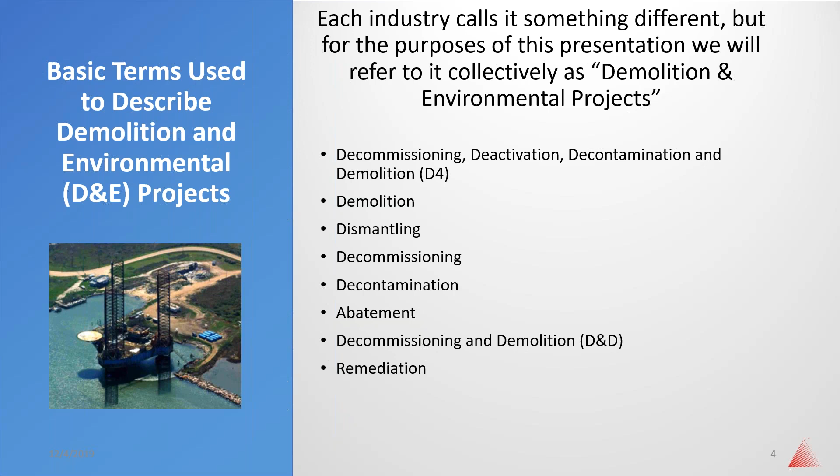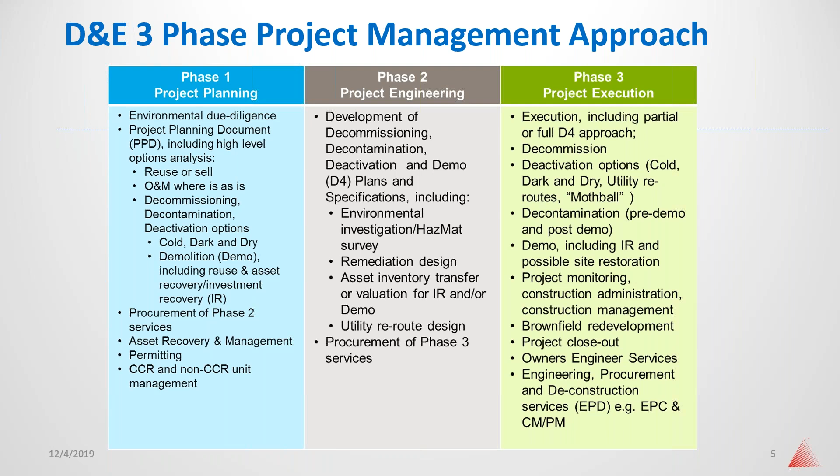Then you have phase three, which is project execution, the nuts and bolts, actually making the project happen. So it might include remediation, decommissioning or hazardous material abatement. It might include demolition, site restoration, investment recovery, or all the above.

So the next two slides show some of the elements of a D&E project. Some or all of these tasks might or might not apply to you, depending on whether you're an owner, an engineer, or a contractor.

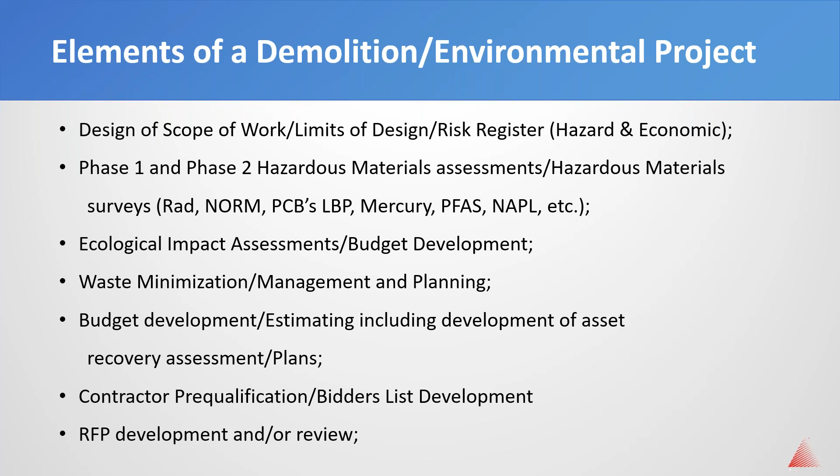So here's some more of the elements, and again, they're all in line with the PMI Institute approach. Now, one of the first things you must do before you tear something down is to decommission it. That collectively includes making the facility ready for further action by performing such things as lockouts and tagouts, reroutes, purging and cleaning of piping, equipment, and so forth.

In a previous slide, I referred to the principles of investment recovery. That philosophy is affectionately known as the 7 R's, starting from the reuse option, decreasing in value all the way down to remove. If you think outside the box, using the 7 R's as your guide, you can pretty much feel confident that you've exhausted all options to achieve maximum value.

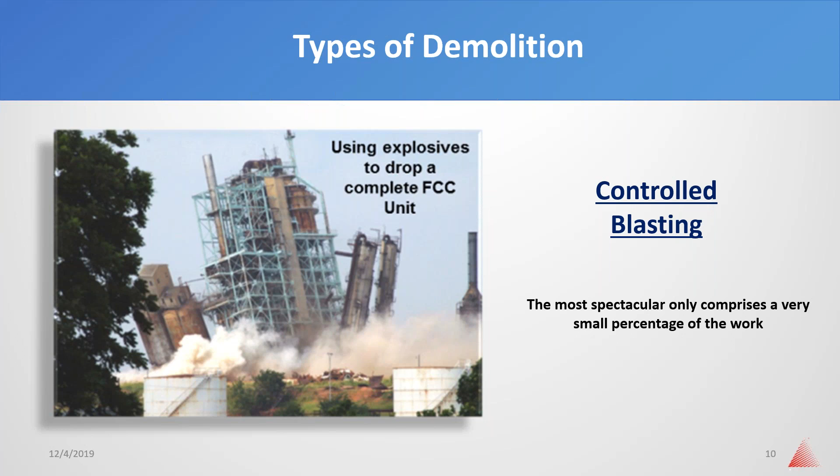So let's look at the different types of demolition. Controlled blasting is probably the most spectacular, but only comprises a very small percentage of the work. This shows dropping a 300-foot-tall, 3,000-ton fluid catalytic cracking unit at an oil refinery in Oklahoma. Now, most of you have probably watched something like this on television or experienced it on one of your own projects. While everything appears to take place in seconds, it's preceded by weeks or even months of preparation that includes such things as decommissioning, asbestos abatement, and pre-weakening the structure.

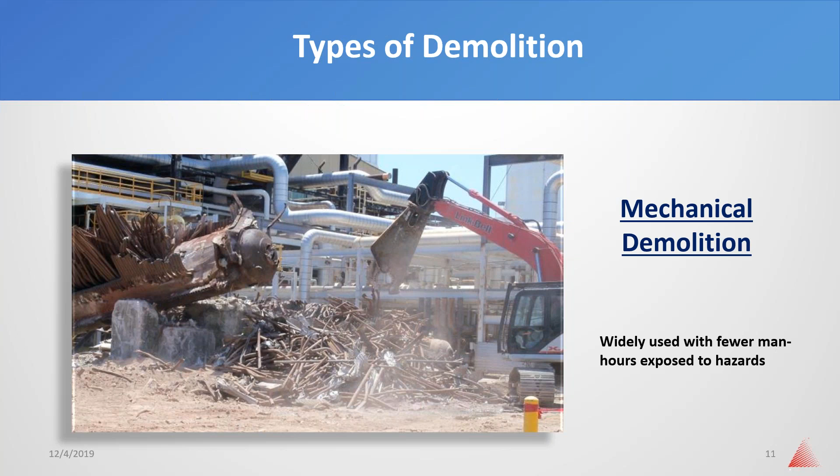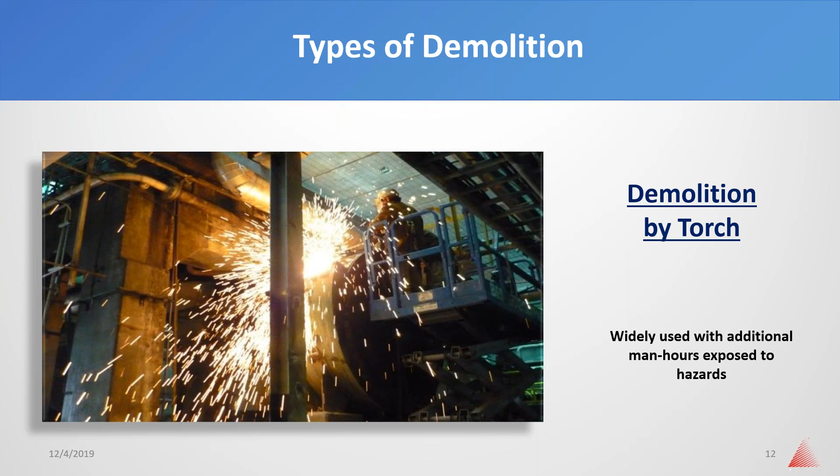Experienced demolition burners, some people call them demo techs, high burners, whatever you decide to call them, they're an amazing lot of individuals. They use terms like set cut, hinge cut, drop cut, fish mouth, and they can make a 3,000-ton structure come apart like an erector set. It takes years to become proficient with this trade, and good demolition burners are worth their weight in gold, and they're very difficult to find. While every member of the team has an important role, good demolition burners and highly experienced equipment operators make up most of the backbone of the demolition portion of any given project.

Then there's also dismantling, taking things apart by cranes, either by unbolting, sawing, or using cutting torches. This is widely used with more man-hours exposed to the hazard. Now, while it is definitely a slower process and much more expensive, sometimes it's very necessary, especially when you're working in close proximity to operating equipment, utilities, piping, or anything else that cannot be damaged.

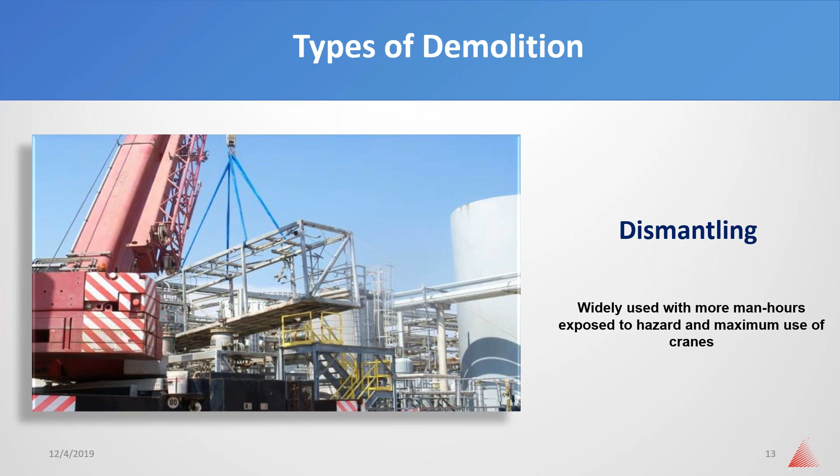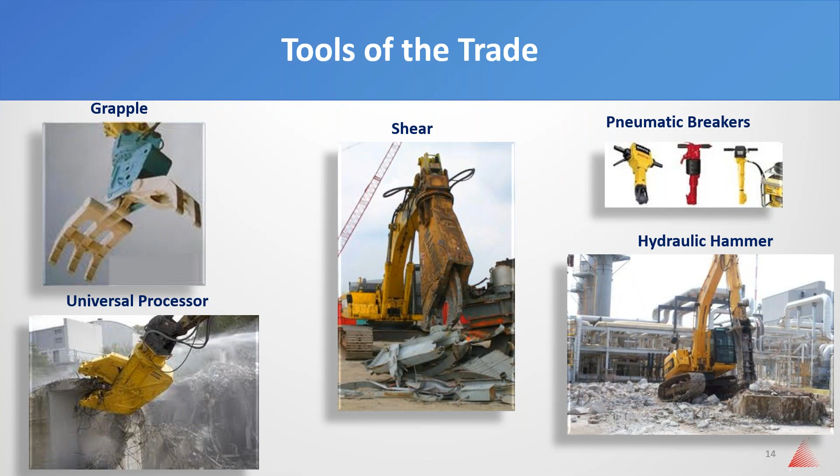Now, if you look at the grapple and the shears and the hammers and the processors, the operators make short work out of structures and foundations that weigh hundreds, if not thousands of tons. But they never lose sight of the fact that one piece of steel or one piece of concrete the size of their fist could hurt or kill them or somebody else if it hit them. That's why you give these operators a wide berth and not get too close. It looks so innocent from a distance, but could be very deadly up close if you're not careful.

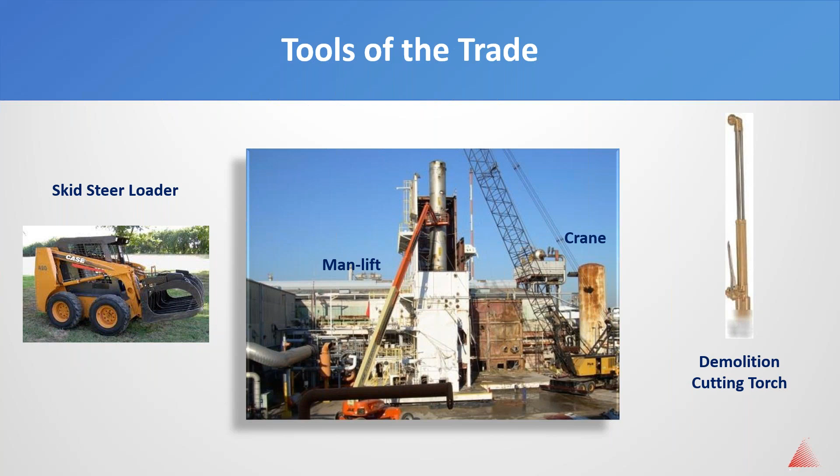So here's some more tools of the trade. The skid steer, the man lift, the crane, and the 3-foot cutting torch. Now, if a contractor comes out to a job site with a 1-foot shop torch, be very aware. The 3-foot or longer torch, in addition to being an operational and engineering control, because it allows the cutter to keep his or her head out of the fumes, which could be toxic, is also a safeguard where the cutter can stay further back away from the material they're cutting. That way, if it jumps on them or snaps or something, they don't get hit. Now, a 1-foot shop torch just doesn't allow you that extra added safety advantage.

Construction versus demolition. If you can't measure it, you can't manage it. But make sure you're using an effective management tool. Now, many owners use construction metrics to pre-qualify and measure demolition contractors. That does not necessarily work because demolition is an entirely different animal.

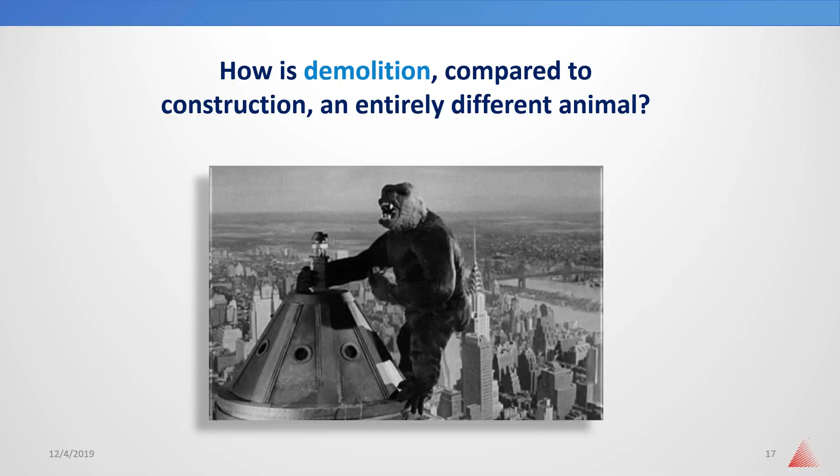Modern demolition crews are mostly mechanized, so there are fewer man hours and demolition crews are much smaller. Even though you're dealing with more hazards, one recordable injury on a demolition project could blow your EMR and TRIR completely out of whack if compared to construction metrics.

There are few formal classes to learn demolition, so mentoring as a way of learning is more the norm than the exception. Crane and rigging is more flexible in demolition, but with more hazard considerations. Accurate drawings are a rarity in demolition, and field calculations must be used in many cases to determine weights as well as center of gravity on lifts. There's more unknowns in demolition, both above ground and below ground.

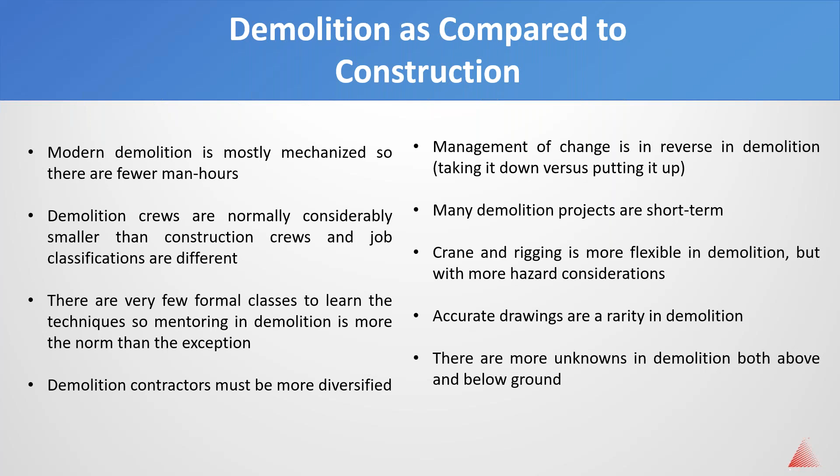Here's some more challenges on demolition projects. Non-standard rigging. Remember, being safe doesn't always mean being pretty. Fall protection. You're taking everything down, so what are you tying off to?

Uncharted asbestos, lead-based paint, and universal waste. You need to have a competent person on site at all times, able to recognize areas that might be suspect and missed during the hazardous material survey.

Hot work. Know what to look for regarding the potential trapped product and residues to prevent a fire and explosion. Unauthorized access to the work area. Have barricades, both hard and soft, with appropriate signage to prevent non-essential personnel from entering a regulated area.

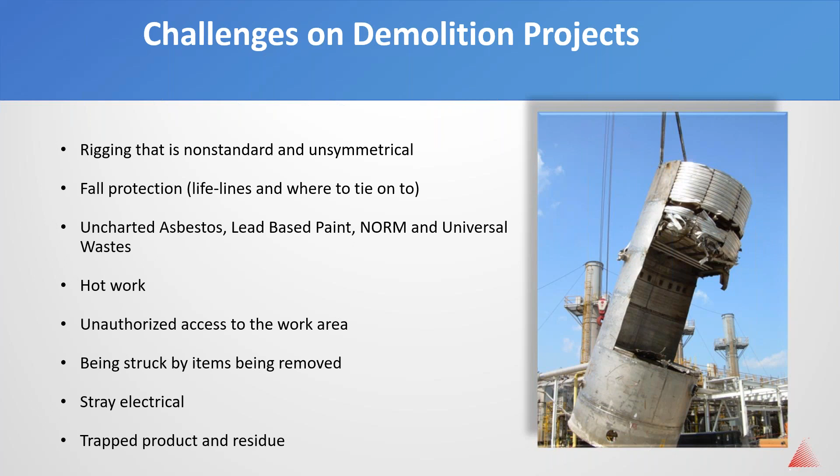Sign-in and sign-out sheets are also recommended on some projects. Structural fatigue of walkways and ladders. Will they sustain your weight? Are they safe to tie off to? Are they safe to walk on? Will they sustain themselves and stay together during the lift, or will they fall apart as soon as you put pressure on them?

In some cases, the best and safest removal method might be just to cut something and let it fall in a controlled manner. Sometimes that's a hard sell to the owner's safety department, but when it is the best way, it must be considered. Poor training and mentoring of workers. It's important that workers, even the certified ones, go through a mentoring program. You can have a certified crane operator, for example, with no demolition experience. In some cases, they need to be placed with an experienced demolition operator before turning them loose on their own.

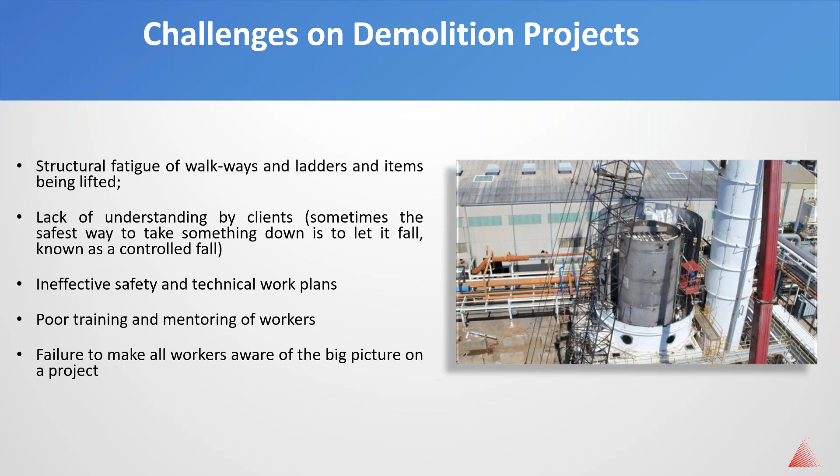Also, failure to make all workers aware of the big picture. It's much easier for everybody to exercise stop work authority in the event of a perceived safety hazard if they know what's going on around them.

So even when somebody tells you that a process system is clean, you need to verify it on each and every cut, regardless if you're cutting it with a piece of equipment or cutting it with a torch. Now, you can tell this unit might not be clean. There could be trapped product in the exchangers, inside the piping between closed valves, blind flanges, low-lying areas, inside manifolds, under tank bottoms, and so forth.

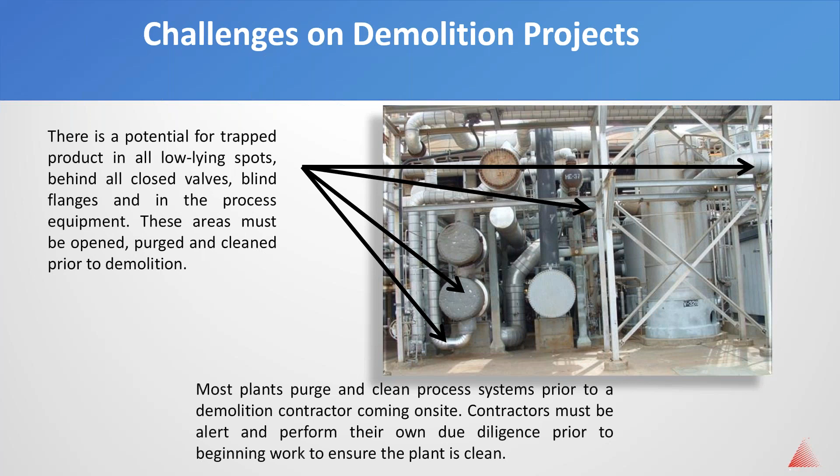Also, in many projects, especially your oil and gas projects, you also need to be concerned about preventing sparks from going into the sewers, because they too could also be explosive.

Stray electrical. The owner can have all power to the structure locked out and tagged out. But what happens if somebody 30 years ago had run an independent electrical line to the main unit that was off the main grid? We've all seen that happen. Always treat all electrical lines as if they were live until you verify otherwise.

On fall protection, make sure what you tie onto is more than adequate. Do not cut yourself or your coworkers down. You've got a lot of folks up in that structure using cutting torches. Make sure they're communicating, and that gets back into having a proper balance, a ratio of supervision to workers. Use lifelines whenever necessary, and always have a 100% tie-off rule in effect.

Watch for holes in the floor where grating has been removed. Cover up the holes in a structurally sound manner and put up hard barricades as soon as possible. And as mentioned before, never assume that catwalks and staircases and ladders will support you. Be aware of where you are at all times.

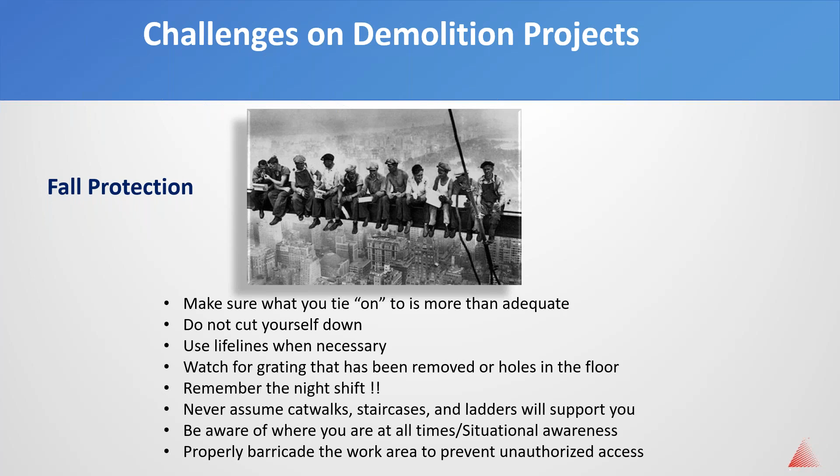Situational awareness is especially important on D&D projects. Always have an immediate escape route if something unplanned happens, regardless of what your job assignment is or regardless of what you're doing.

One of my pet peeves is failure of a company to provide the opportunity of 360-degree feedback from everybody in the field. No one wants to get hurt, and no one wants to hurt anybody else. By having a redundant, perpetual 360-degree quality improvement process, you're creating an environment that promotes understanding and participation by everybody.

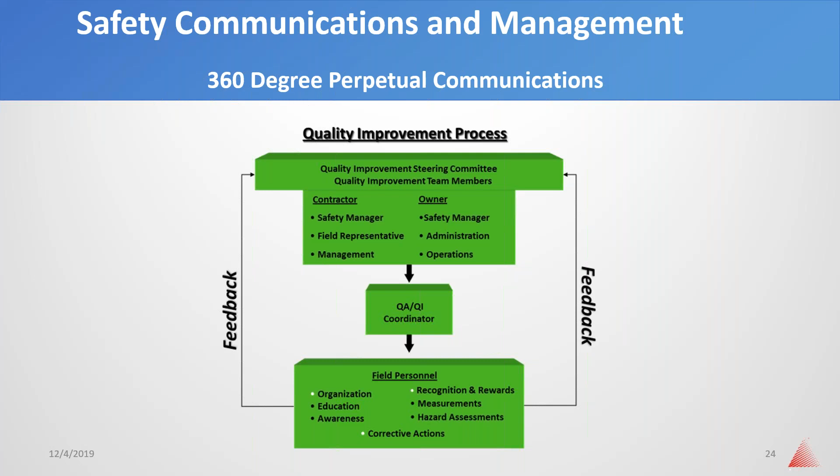So every project has enough brain power to prevent all accidents. You just need to have a program in place that is proactive at tapping into that brain power.

Choosing the right company to do the work is a very large part of the puzzle to have your project done safely and economically. A few of the things you need to look for in a top-notch company - by all means, this list is not conclusive of everything, but some things.

Needless to say, a great safety record and HSE program, and make sure you verify statistics. It's nothing more than numbers on a form, and you can go through ISNetWorld or some of these other services and let them verify. Make sure you verify the statistics.

Employee retention and experience. Do the employees know the HSE program, or is it just a fat book on the shelf? Quantity and type of company-owned equipment available for your project.

Financial stability, bonding capacity, experience on similar projects in similar industries, experience to effectively use investment recovery to offset costs, commitment of the management to the plan and the length of time in business, ratio of supervision to workers in the field, and also a company's ability to turnkey as much of the work as possible with minimum subcontractors.

In addition to other benefits, this could result in significant cost savings by avoiding markups associated with multiple subs.

Development of a site-specific technical work plan as well as a site-specific health and safety plan on every project is very necessary. If a contractor cannot explain to your satisfaction what their plan is, then chances are they probably cannot implement that plan. The plan should be in addition to their corporate safety protocols and be concise enough so it can be implemented in the field.

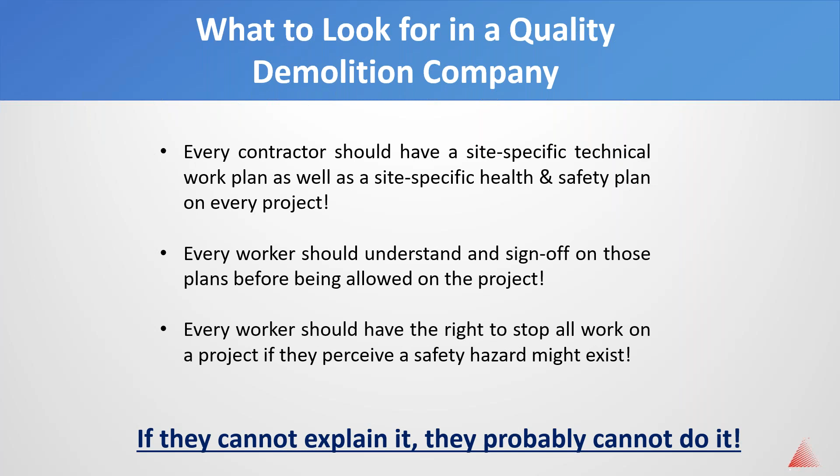And remember, it's all about the people. You could have a good company and a bad crew, or you could have a mediocre company and a great crew. Learn to evaluate both.

Make sure the A team doesn't start the project and lesser quality personnel get sent in later. When you're evaluating a company's capabilities, take into consideration the talent and experience of the staff that is on that team prior to ruling them in or ruling them out.

The great companies are always identifying the gaps in their services and bridging those gaps through strategic hires and acquisitions.

Also, a mentor told me years ago, the most dangerous part of a D&D contract was signing your name to it. Now, if possible, and if it makes economic sense, keep as many tasks under one umbrella to avoid multiple contracts, if at all possible.

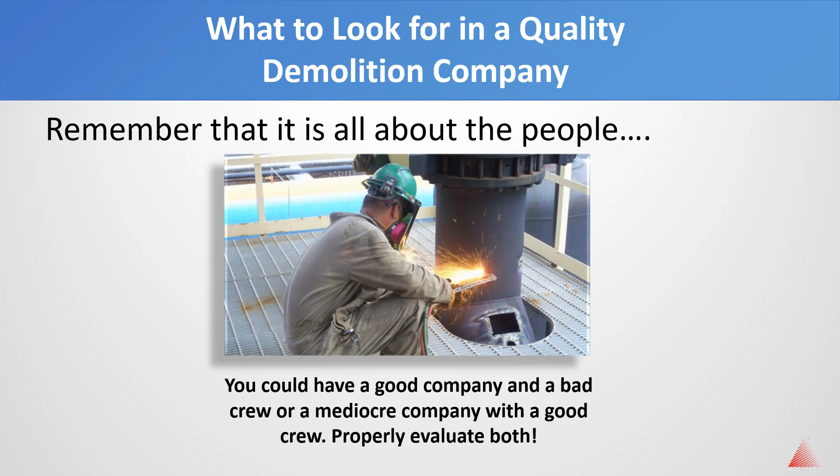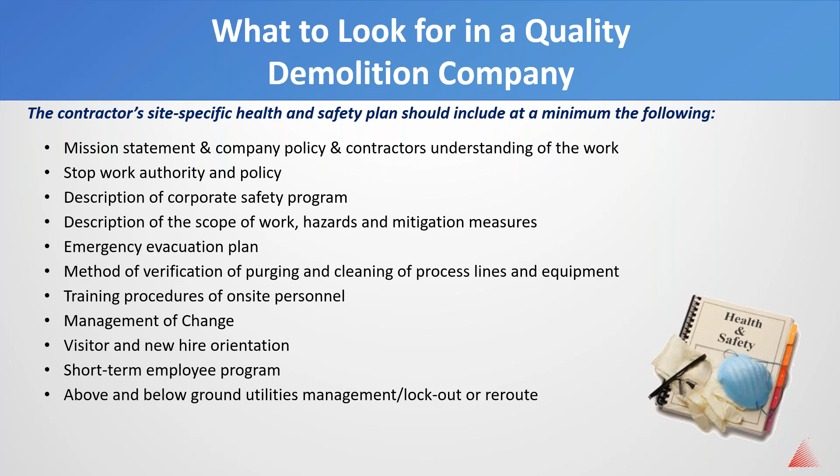Now, the next few slides show some of the elements of a contractor's site-specific HSE program. This list is not inclusive of everything that should be included, but rather just an example. You can download and read these at your leisure, and I'm just going to breeze through them. This is not conclusive of everything you might see, but it's basically bare bones, skeleton.

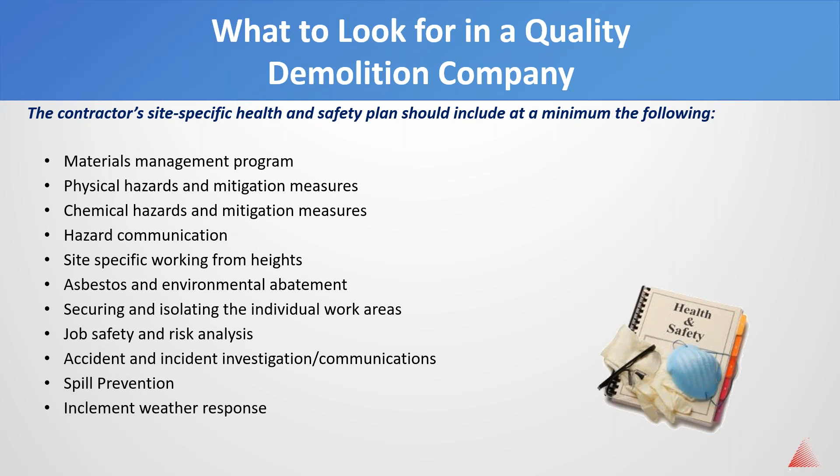Now, this presentation would not be complete without addressing the impact that investment recovery has on the bottom line. Effective investment recovery is essential to a successful D&D project.

So the best way to be competitive and achieve maximum value is through value engineering. Be creative to get your composite unit cost down and your composite unit value up. Learn the difference in value of the various metal and equipment, and look at the project as a sum of its components rather than scrap metal overall.

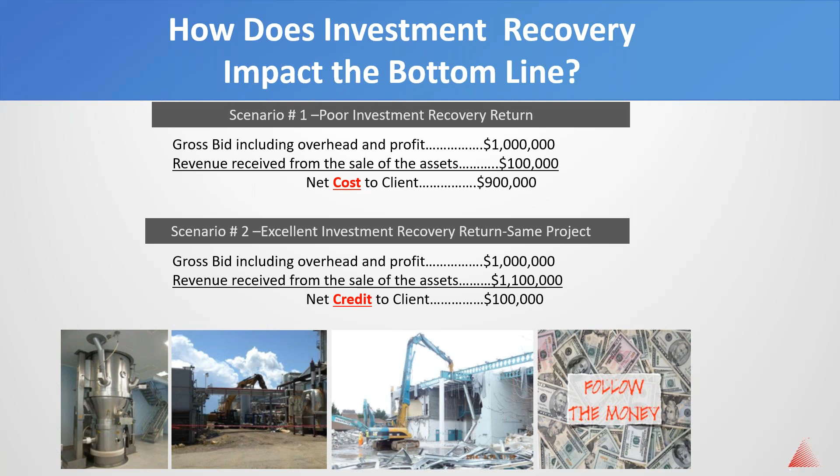In order to structure a project to maximize return on the assets and be successful, you must first recognize that value yourself and let the contractors know where to look to find that value during the bidding process.

Provide enough lead time for the contractor to properly evaluate the project and prepare their estimate. Many owners want a stellar bid, but they don't want to give the contractors enough time to evaluate. What happens in many of those cases is that the contractor piles on significant dollars to cover contingencies associated with unknowns or things they did not have a chance to evaluate.

Design a well-defined scope of work with the right contracting mechanisms. Develop a schedule that complements that scope of work and allows for investment recovery activities. Make sure the contractor does not remove the most valuable assets first and then walk away from the project. Again, look at the assets as money.

Be receptive to alternatives, but research the true value of those alternatives. Promote ethical and transparent behavior through example. Provide accurate documents showing weights and metallurgies if they are available. Do not provide unnecessary documents.

RFPs that have hundreds and hundreds of pages of unnecessary documents cause confusion that could cause somebody to make a mistake, and increase the time to prepare a bid just by having to review all those documents to get to the things that you do need. Have an accurate hazardous material survey. Make sure the bids are submitted in a manner that they can be properly evaluated, comparing apples to apples. I have another slide that will graphically show what I mean by that very shortly.

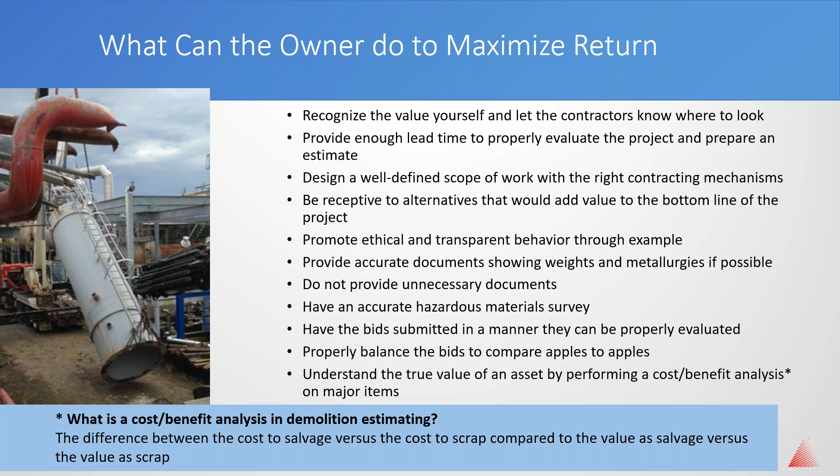There are two basic categories that must be taken into consideration when evaluating and managing costs. You have tasks where there are scrap and salvage credits to help offset the unit costs, such as taking down metallic items or anything that's recyclable. And then you have tasks where there are no scrap and salvage credits to offset the unit costs, such as trash disposal, remediation, and asbestos abatement.

Here's a simplistic way of explaining that. If a contractor has a composite unit cost of $400 per ton, and their composite unit credit is $200 per ton, you can expect to be charged $200 per ton to have your work completed. Now, if that contractor sells a generator for what equates to $1,200 per ton, they would have an excess of $800 per ton that could be applied against non-revenue producing tasks.

On any given day on the market in the USA, plate and structural steel scrap might be selling for $200 per ton. Copper might be selling for $5,000 a ton, and nickel might be selling for $10,000 a ton. Meanwhile, your composite cost might hover at $400. All excess revenue could be applied against the non-revenue producing tasks.

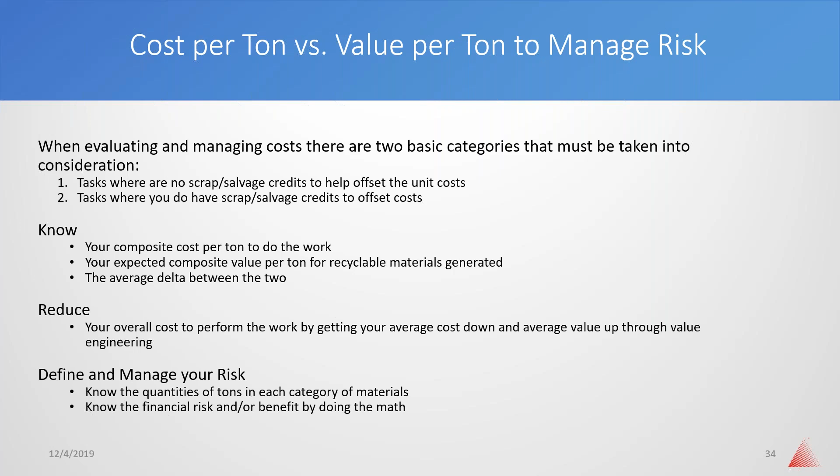Many times, the risk of adverse fluctuation in the market can be mitigated through negotiated agreements with the mill or the scrap buyers, or for really long-term projects, tying the scrap credits into an index, such as London Metal Exchange, COMEX, or the American Metal Market. Additionally, it's a good strategy to have everything on your project ready to pull the trigger for when the scrap market is on the upswing, if you have the luxury of being able to do that.

I've given you a lot of examples, but one particular project I was involved in, we took down an entire 600,000 barrel per day oil refinery. We performed an investment recovery assessment in advance, and then we followed the market until the composite value per ton was significant enough to allow for complete demolition, including asbestos abatement, at zero cost to the owner. It can happen, not always, but it can happen.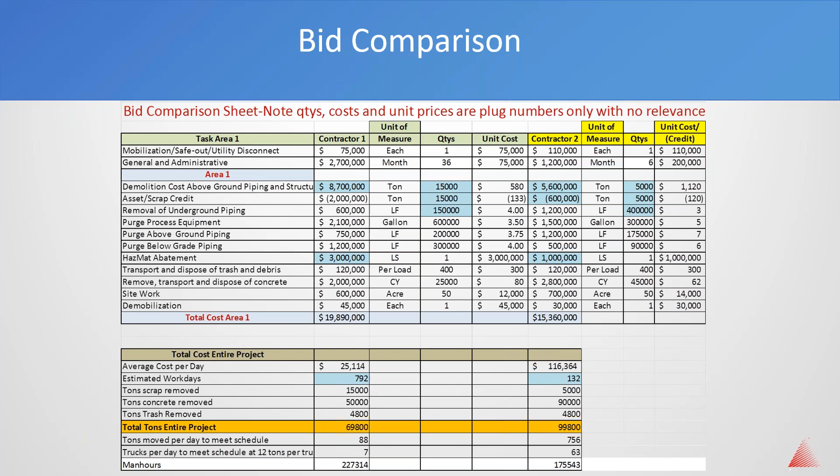Now, in any event, you need to balance the bids and ask the right questions to make sure the contractor has had a chance to revisit their numbers and ensure they can live with them, rather than coming back to you for substantial change orders or even worse, walking away from the project.

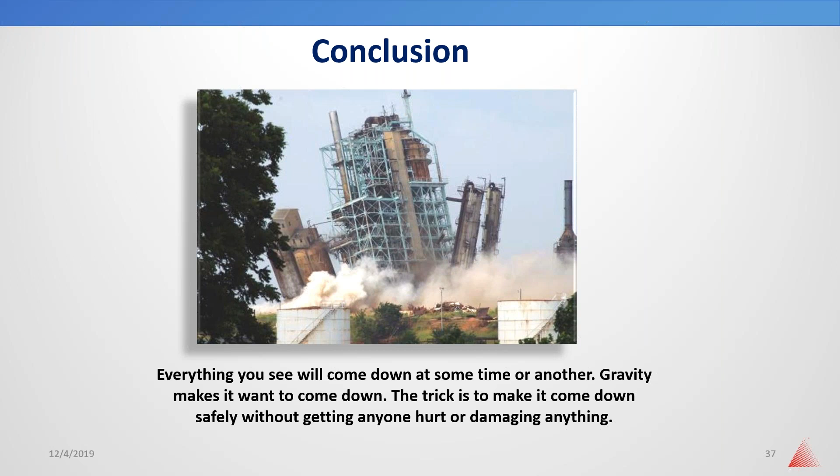So remember, everything you see will come down at some time or the other. It might be 5 years, it might be 1,000 years, but it's going to come down. Gravity and corrosion makes that want to happen. The trick is to make it come down safely and economically without getting anybody hurt, damaging anything, or contaminating the environment.

Any questions? Thank you, Mike. You're very welcome. We have one question, and that's probably all we're going to have time for.

When utilizing the equipment by either selling and or scrapping to minimize the cost of the demo, is the sale and scrapping of the assets all included in one contract, or do you need separate contracts, one for selling, one for scrapping, and one for actual demo work? Concerned about the different terms and conditions related to each disposition.

What do you say, Mike? Well, it really all depends on the structure of the project and the timing of the project, how much time the folks have. Normally what happens is that the contractor is basically given the scope, and everything within this scope of work is going to be included in your scope. So any credits that you get is going to be credited back against the costs associated with that.

So you can handle all that into one contract, but you also have to be concerned about product liability and how they do the sales, and make sure that you're covered contractually, so somebody doesn't come back to you as an owner with a product liability concern because something blew up or had some kind of problem where somebody got hurt later on down the road. And if that didn't answer the question, let Jane know, and I'll make sure we come back with a more detailed answer. Maybe we can squeeze this other one in.